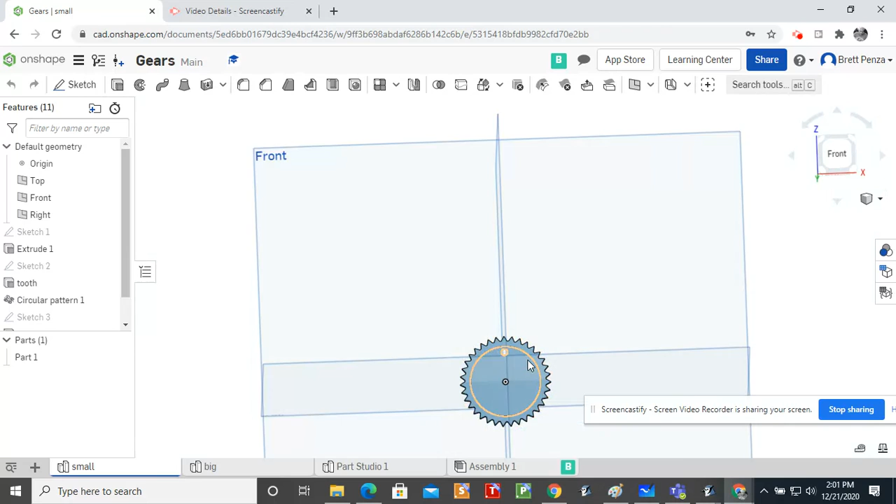Okay, so we're going to learn how to do a gear here, okay? So let's go over here and let's look at the first gear, which is the small gear. So first we make a part and we call it the small gear. Now the important things here are going to be to create the sketch.

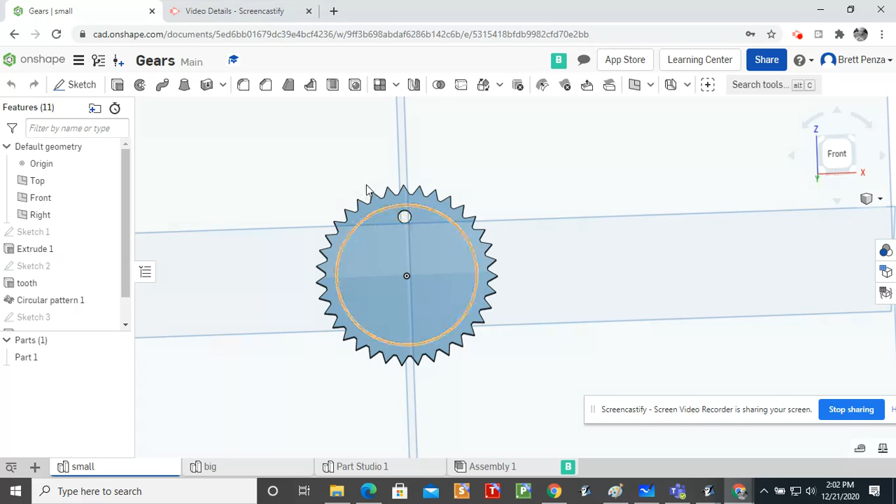The first sketch is going to be a diameter of 1, okay? And then also put a little circle in here to make a little hole in your gear, okay? Because then you'll be able to tell when it's turning around. We're making the tooth, and the sketch for the tooth is going to be 0.07 equilateral.

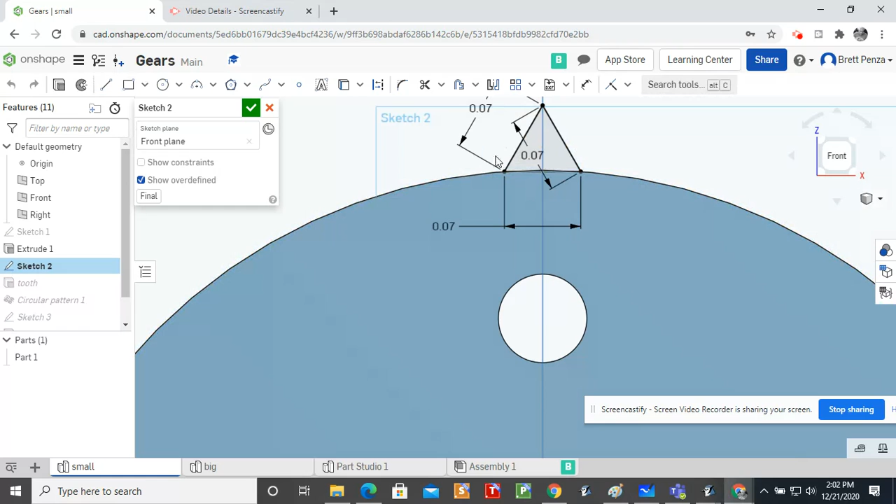Make sure that the points on the tooth meet the circle, okay? And then you make a nice equilateral triangle, 0.07. And then that's basically it. The next thing you're going to do is the pattern, and the pattern is going to be the tooth. You're going to do a circle pattern. You're going to make 35 of them, okay? And that'll give you a nice tooth with a little bit of space between it, which you need.

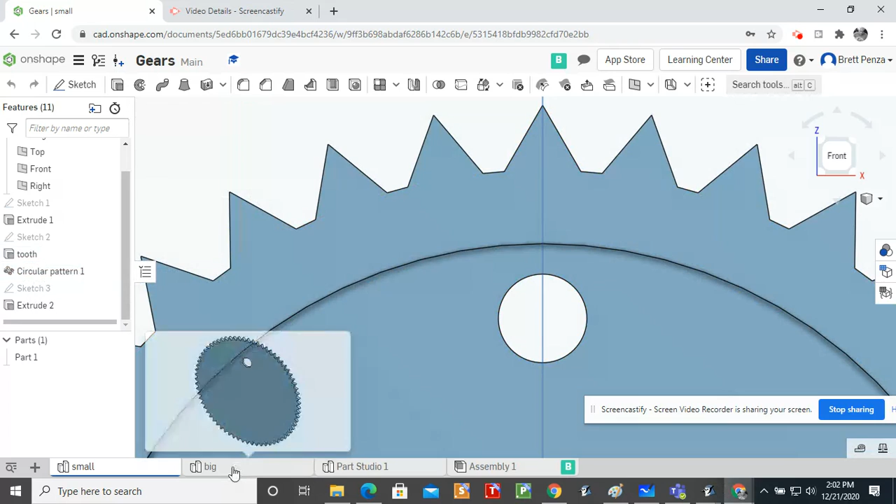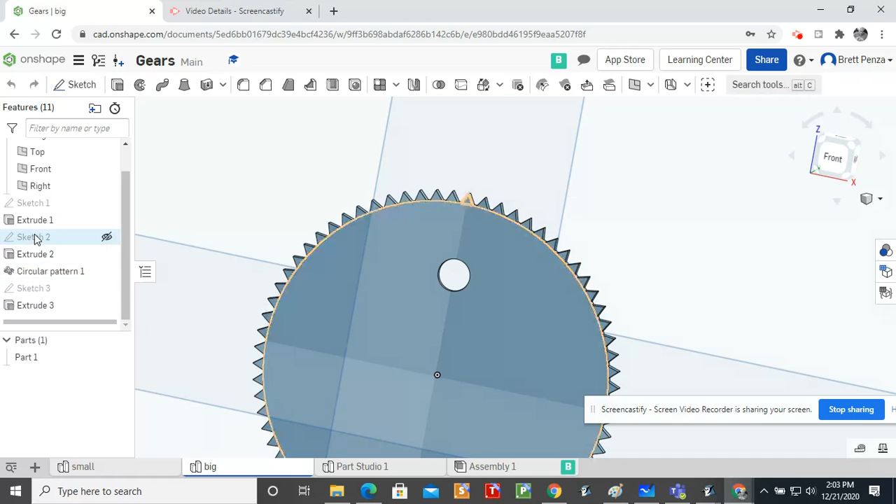Now, if we go to the big gear, the big gear is going to be the same tooth, okay, 0.07 on the circle, except the main circle, the first thing you're going to do, is going to be 2. So this is twice as big as the other circle, okay? And then the tooth is going to be, again, 0.07, same size on the tooth, okay? Also, 2 corners touching on the circle.

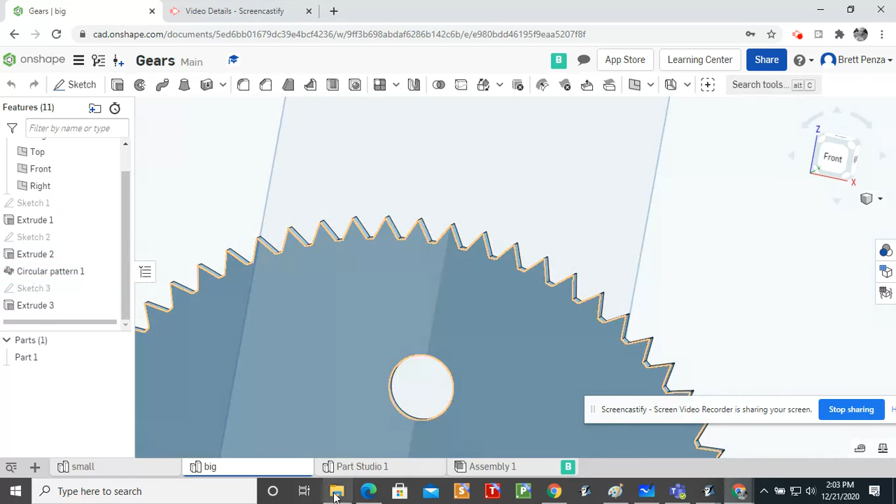And then for the circular pattern on that, we're going to use 70. Should be twice as many because the other one had 35, so this will be 70. And that'll give you 2 nice gears. Now the other thing you got to do is you got to create a little cap, like something like this, okay? And this is going to be a fixed cap when we do the assembly. So you can just make a circle, extrude it, or you can put a nice little cap on it like I did, okay? So now let's look at the assembly because that's really where everything's happening.

The first part that comes in is the cap. You're going to bring the cap in, you're going to fix it in place right on the point of origin, okay? Because that has to be there. So then we put the first gear. When we put the first gear in, the first gear is going to be mated to the cap, okay? And it's going to be a revolute mated to the cap, okay?

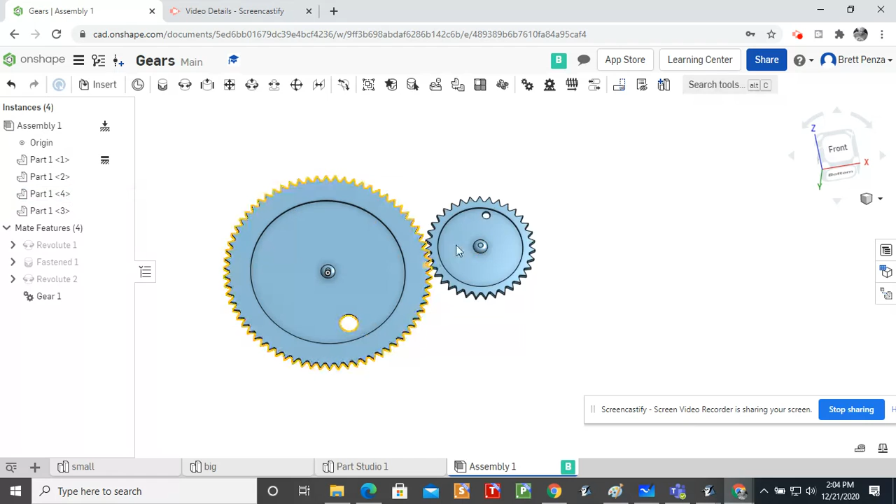Then we're going to take another cap and we're going to put that cap over here. Now, when you put that cap in, you're going to fasten it in place. You're going to fasten that cap to the original cap. And then you're going to set the distance. Now, 1.58 seems to be a good distance. Okay? This cap has to be basically fixed, but we're not calling it fixed. We're going to make it fastened, tied to this one. And that's going to be a nice distance away.

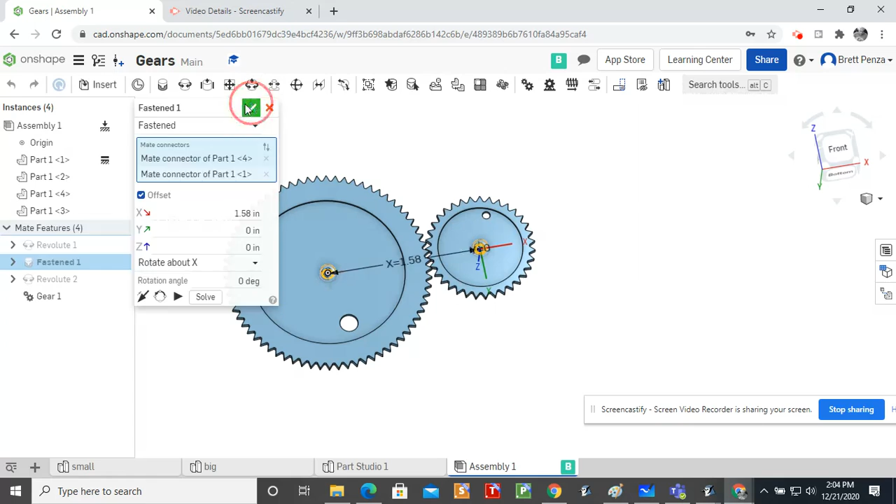Now that we've done that and fastened it, we can get the third gear and we can revolute mate that third gear to here. So now we've got the gear in place. Now we have to create the relationship. So all you do for that relationship is you go to the gear relation, okay? And again, I have it here, so I'm going to just edit it to show you. You're going to choose the revolute and the revolute 2.

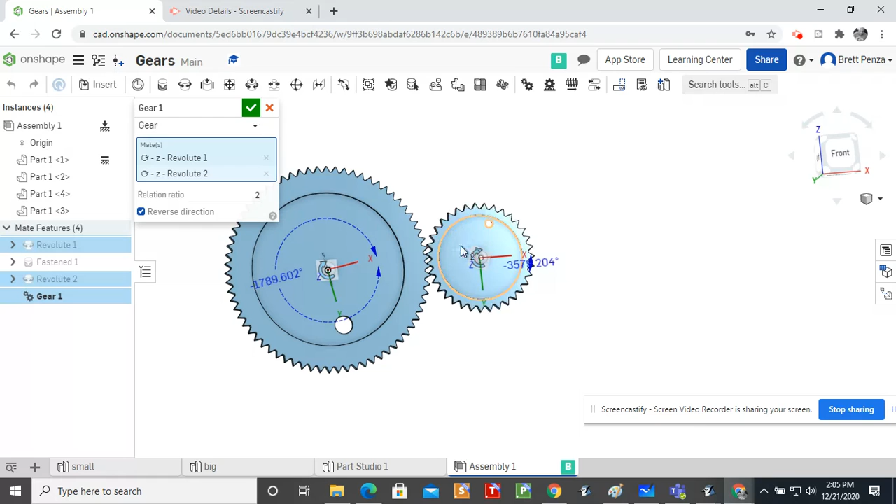Revolute 1, revolute 2. You're going to create a ratio of 2 because this goes around 2 to 1, right? Twice as big. And you might have to hit reverse to make them go in the right direction. And that's all there is to it. And then you say okay, and when you turn this gear, the other gear will go around with it. So that's how you do the gear.

I know I did that quick, but a lot of this you've already done. So hopefully you can put that together.